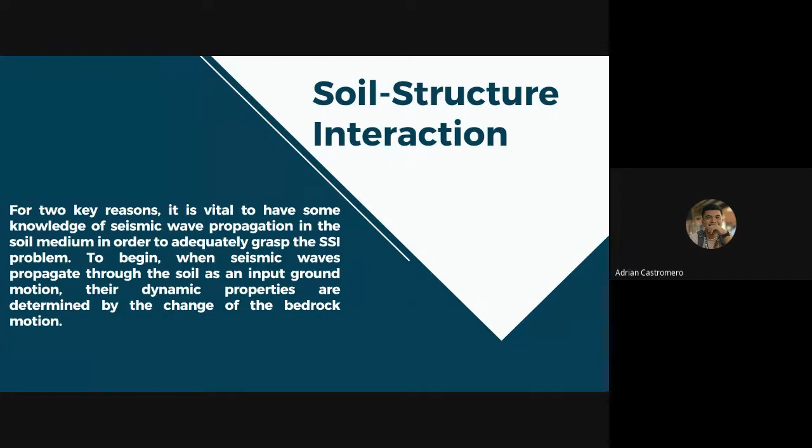So, terminologies of local site effects. Basin soil effect on the ground motion characteristic. So, first is impedance contrast. Seismic waves move quicker through hard rocks than through softer rocks and sediments. As the waves travel from tougher to softer rocks, they slow down and must increase in amplitude to transport the same amount of energy. As a result, shaking is more intense in locations with weaker surface layers, where seismic waves move more slowly. Impedance contrast is defined as the product of the material's velocity and density.

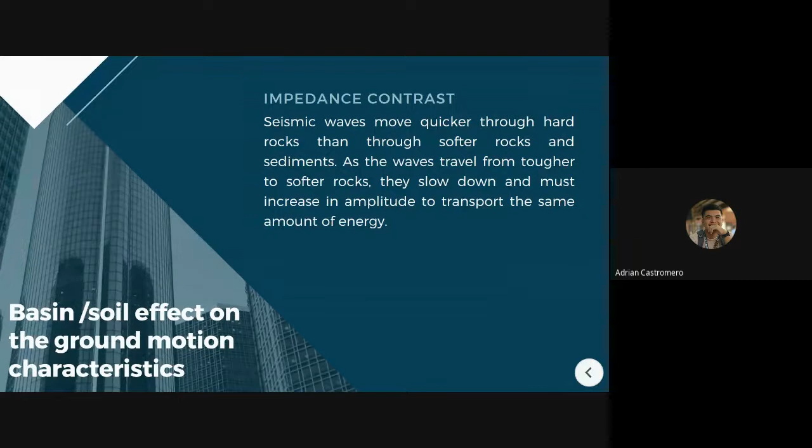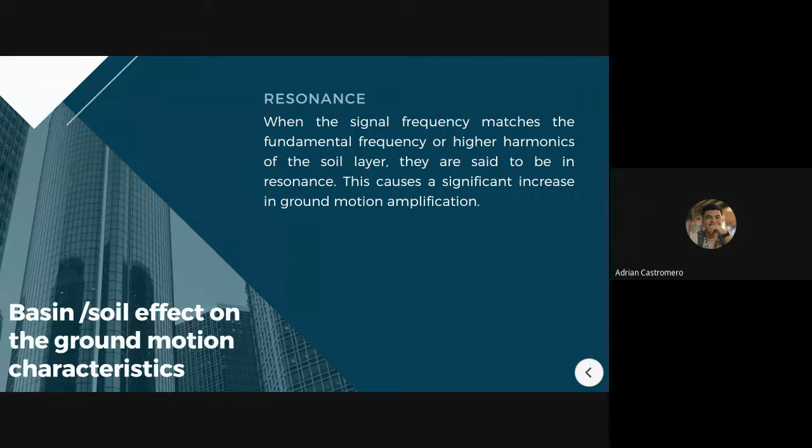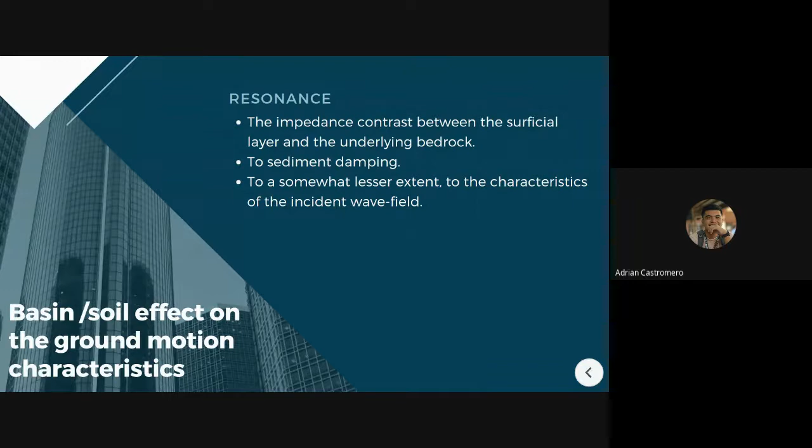Next, resonance. When the signal frequency matches the fundamental frequency or higher harmonics of the soil layer, they are said to be in resonance. This causes a significant increase in ground motion amplification. Resonance patterns are distinguished by a variety of spectral peaks. The frequency of these peaks is related to the thickness and velocities of the surface layer. Furthermore, the amplitudes of spectral peaks are mostly connected to the impedance contrast between the superficial layer and underlying bedrock, to sediment damping, and to a somewhat lesser extent to the characteristics of the incident wave field.

Basin edge effect. When seismic waves strike close to the basin's edge, they enter the basin from the edge and proceed in the direction that the basin is thickening. If post-critical incident angles occur, the waves might become trapped within the basin, as seen in figure 6.2. Surface waves are generated when trapped waves collide and they propagate throughout the basin.

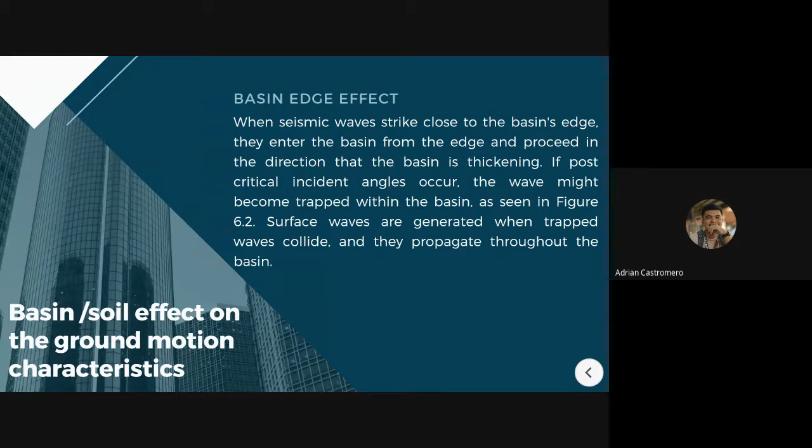Waves trapped in deep sedimentary basins can have higher amplitudes at intermediate and low frequencies than those recorded on equivalent surface material outside the basins, and their durations can be twice as long. This basin edge effect can magnify long period ground motion components and greatly lengthen the duration of intense shaking. Basin-induced surface waves cause intense damage which is confined in a narrow strip parallel to the edge.

Basement topography. When subjected to body wave incidence from below, irregular basement topography causes focusing and defocusing effects. This impact is highly influenced by the azimuth and angle of the incident waves.

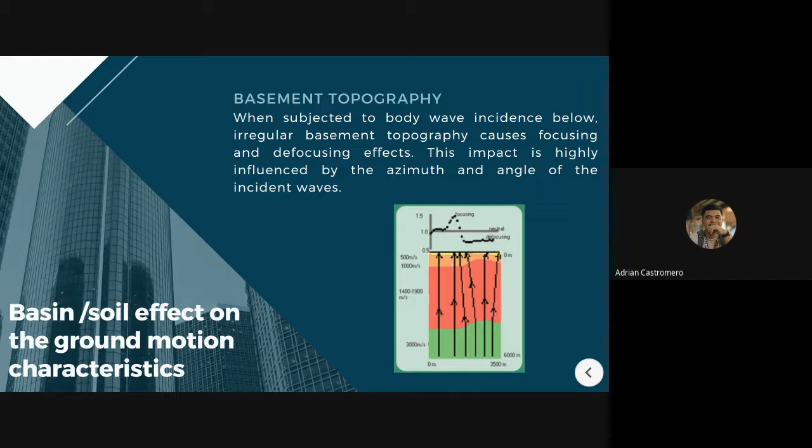Trapping waves. Seismic waves are trapped over soft sediments due to the huge impedance differential between the soft sediments and the underlying bedrock. As a result, the length of ground motion increases. When the layers are horizontal, this trapping solely impacts body waves. In the event of lateral heterogeneities, this trapping affects the surface waves as well. The interference of these waves results in a resonance pattern. As previously explained, the basin edge effect produces entire reflection of the waves at the layer's base, making them potentially highly harmful.

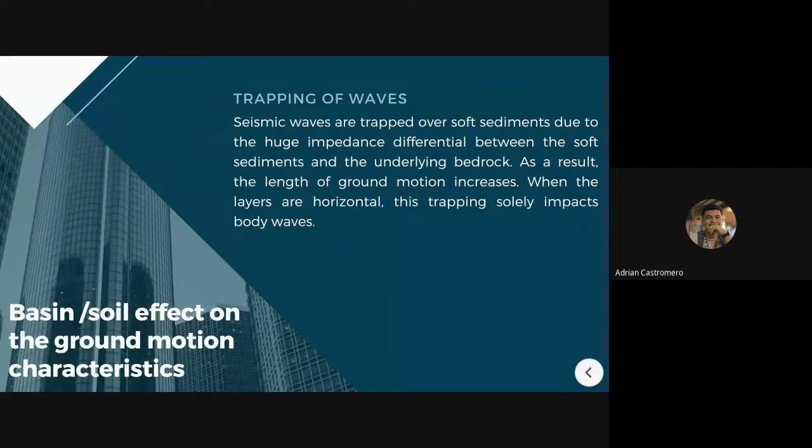So next. Okay, hello. Wait lang. So, ano, effect of surface topography. Ay, rinig po ba ako? Hello? Rinig po ako. Oo, rinig din. Sige po, thank you po.

Effect of surface topography. Surface topography considerably affects the amplitude, the frequency content, and duration of ground motion. So, on the effect of ridge, the ridge generates a large number of surface waves towards the top of the ridge, which propagate towards the ridge's base. The amplification of ground motion is determined by the slope and elevation of the ridge.

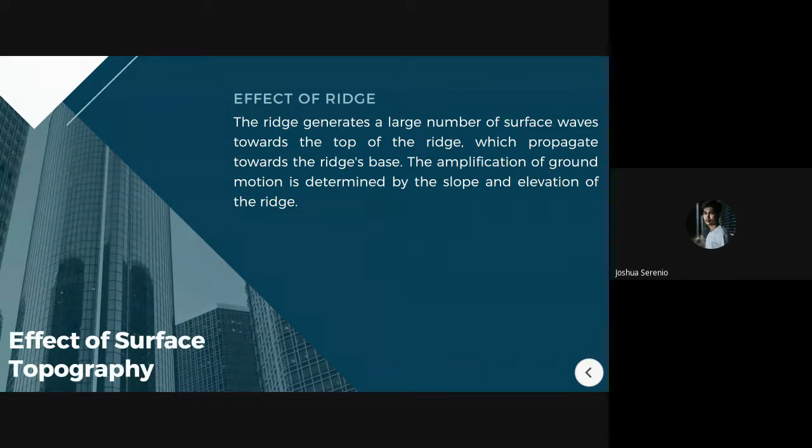Next. Effect of valley. It has been numerically predicted that the de-amplification of the amplitude of motion occurs in the valley owing to the defocusing effect. If the valley is devoid of soil deposits, the intensity may be 1 to 2 scales lower than its surrounding area. Next.

Slope effect. Here, the varying slopes reveal complex damage patterns. Buildings located on or near the bank of steeply sloping hills sustain far more damage than houses located some distance away from the steep slope or on the gentle sloping area in the same hill.

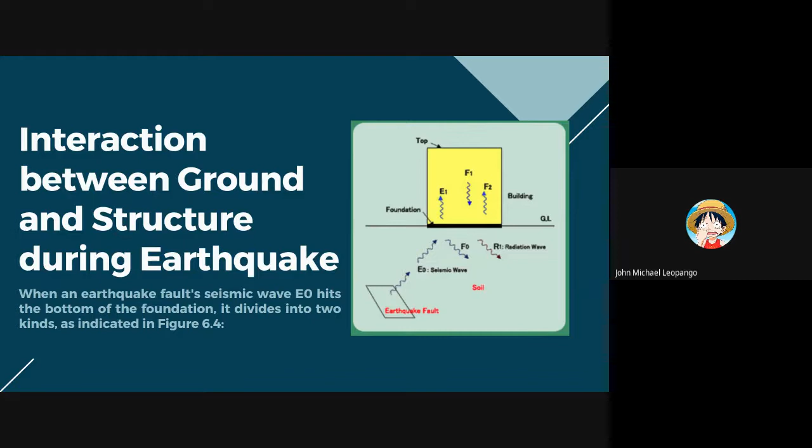When the transmission wave penetrates a building, it travels in an upward direction, causing the structure to vibrate. They are then reflected at the top and go back down to the structure foundation, denoted by F1. At this stage, the phenomenon of soil-structure interaction occurs. Again, a portion of the wave is transmitted into the earth, while the remainder is reflected back and begins to proceed upwards via the structure, depicted as F2.

So as you can see in the figure, there's an earthquake fault.

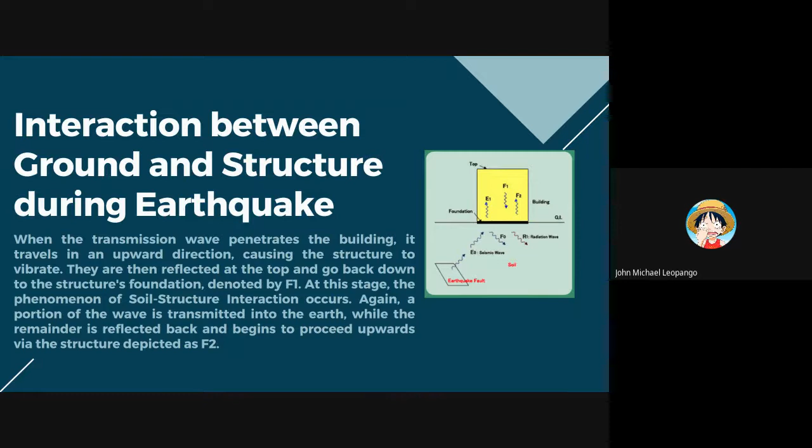Radiation damping of the soil refers to the damping generated by radiation waves. Radiation damping raises the overall damping of the soil-structure system in comparison to the structure itself. Furthermore, when subjected to SSI, the natural frequency of the soil-structure system must be lower than the natural frequency of the soil.

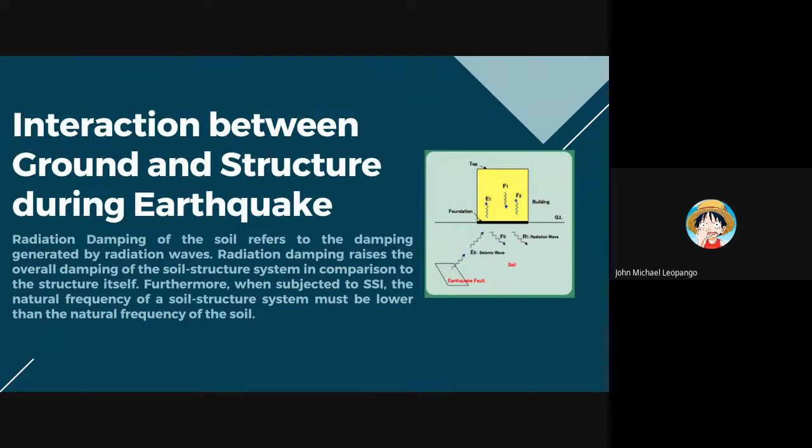First, the kinematic interaction. Kinematic interaction refers to the SSI effect that is connected with the stiffness of the structure. Because of its flexural stiffness, the massless mat foundation inhibits the vertical movement of the ground motion. As a result, instead of free-field ground motion, the mat foundation moves differently. That is, the ground motion is away from the foundation, as does the nature of ground motion in the neighborhood and below the foundation.

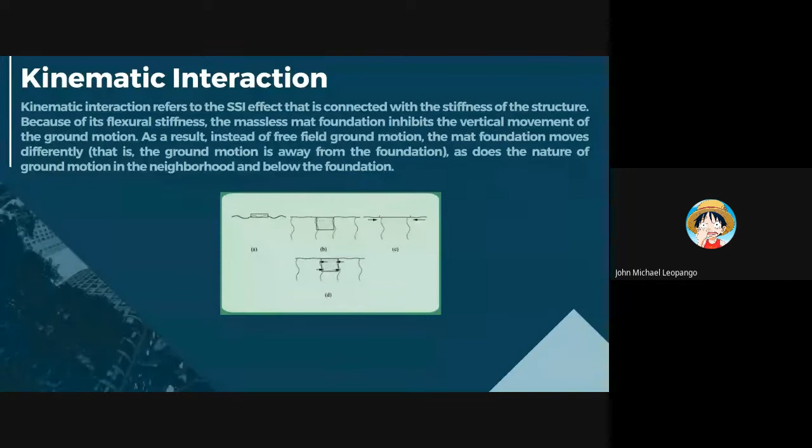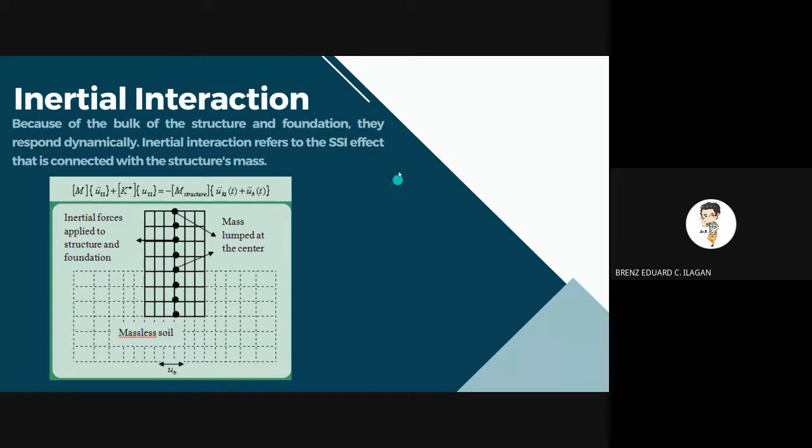Illustration of soil-structure interaction effects. A basic analysis based on Wolf's technique illustrates the soil-structure interaction. Consider the mass, stiffness, and damping coefficient of a single degree of freedom system, coupled to a massless rigid, L-shaped foundation of height as shown in figure 6.9, the one in the figure below. A horizontal amplitude stimulation is applied to the system.

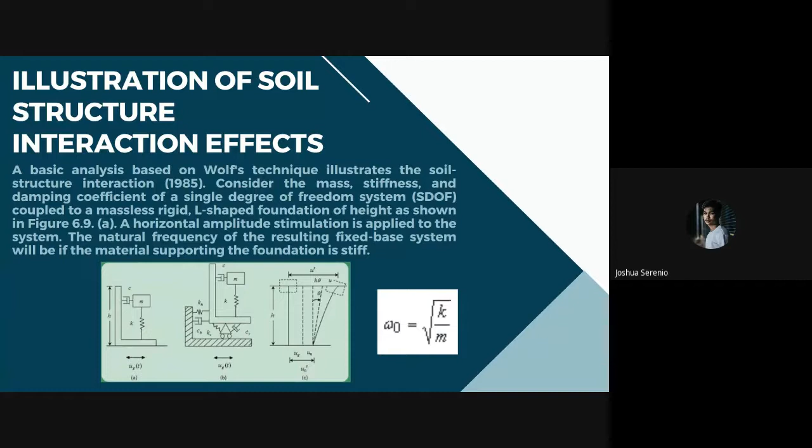The natural frequency of the resulting fixed-base system will be if the material supporting the foundation is stiff. The foundation can translate and rotate if the supporting material is compliant. The stiffness and damping characteristics of the compliant soil-foundation system are represented by Kh and Ch in the horizontal direction and in the rotational direction.

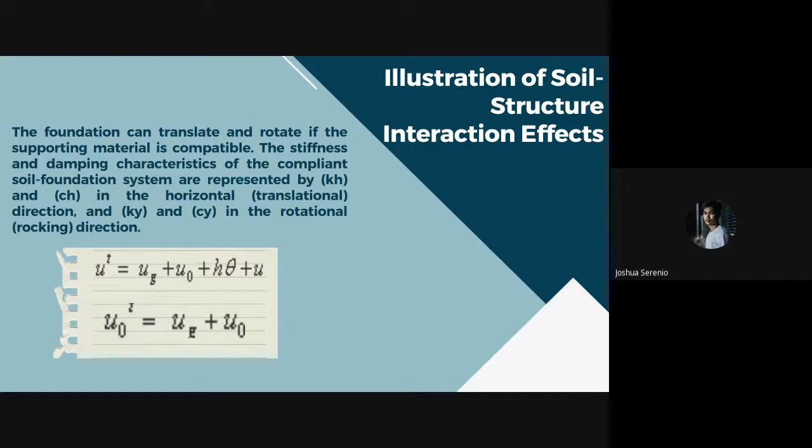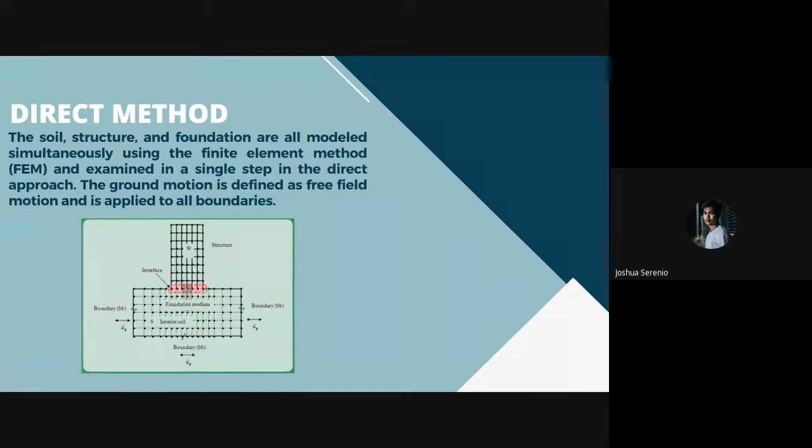Direct method. The soil, structure, and foundation are all modeled simultaneously using the finite element method and examined in a single step in the direct approach. The ground motion is defined as free-field motion and is applied to all boundaries.

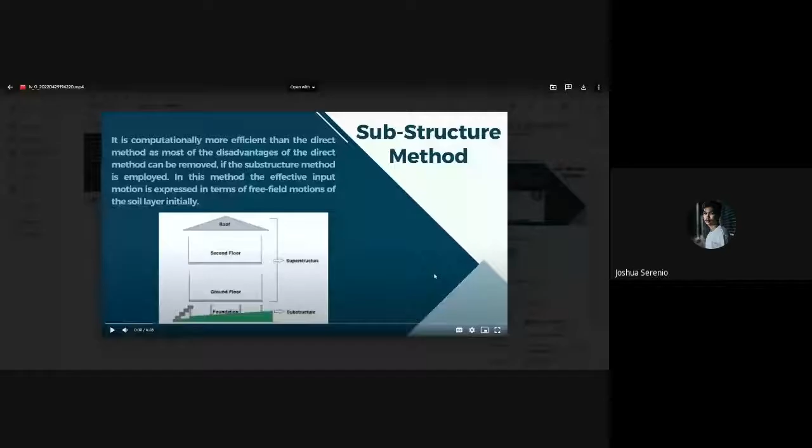Substructure method. It is computationally more efficient than the direct method, as most of the disadvantages of the direct method can be removed if the substructure method is employed. In this method, the effective input motion is expressed in terms of free field motion of the soil layer initially. The substructure method is an established way of overcoming the difficulty of large dimensionality in analysis of structures. An improved substructure analysis method suitable for structures like storied buildings and towers is presented in this paper.

This picture daw po ay represent yung substructure method ng roof, second floor, and ground floor. Sa substructure naman po ay foundation.

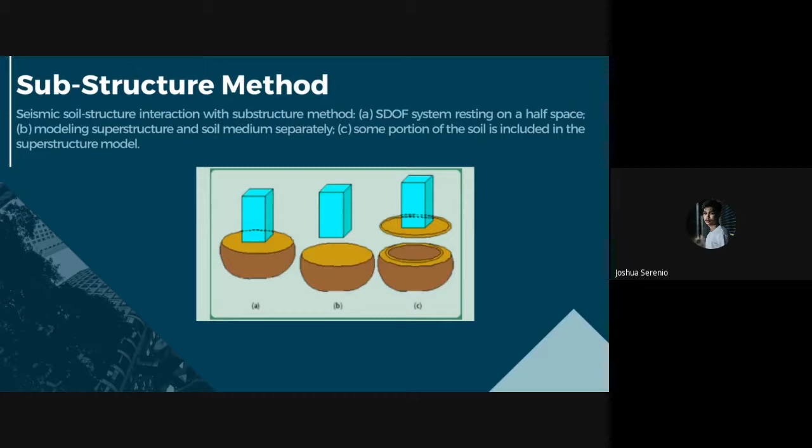Consider a SDOF system supported on a rigid base of a mass and mass moment of inertia, resting on a half space as shown in figure A. To make the torsion effect negligible, the horizontal dimensions of the base are assumed as sufficiently small. The uniform free field ground acceleration at the free surface will introduce the foundation forces at the interface between the base of the structure and the half space.

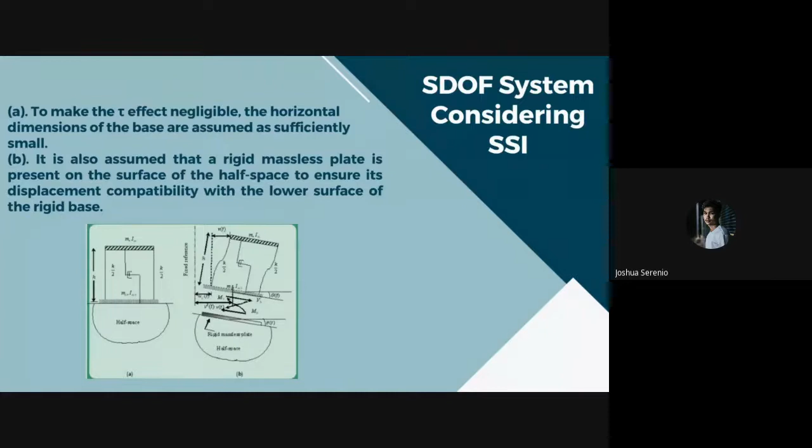B. It is also assumed that a rigid massless plate is present on the surface of the half space to ensure its displacement compatibility with the lower surface of the rigid base. The total base displacement of the SDOF system shown in figure will be v^t(t) = u_g(t) + v(t), where u_g(t) is the free field ground displacement and v(t) is the added displacement or base displacement caused by SSI. Also, θ(t) represents the base rotation caused by SSI.

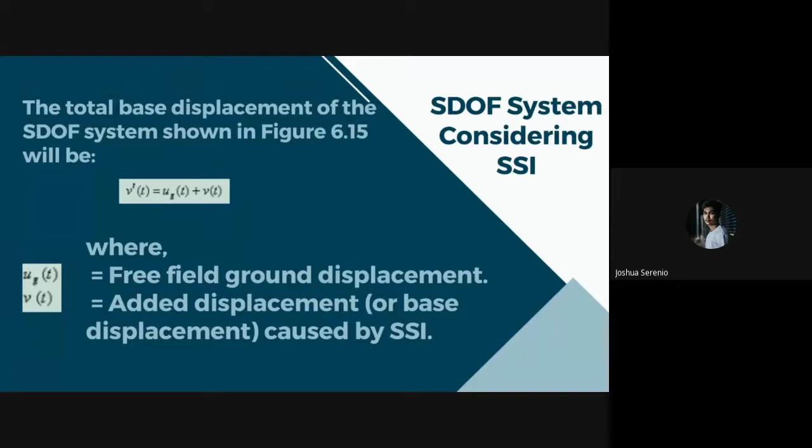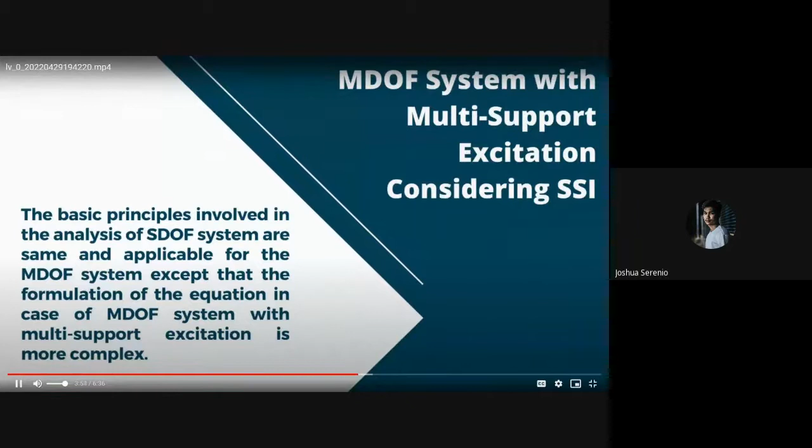It is also noted that as the SSI results in translation and rotation of the base of the SDOF system, it introduces added displacement of the system, and thus the overall system has 3 DOF. MDOF, or multi-degree of freedom system, with multi-support excitation considering SSI. The basic principles involved in the analysis of the SDOF system are the same and applicable for the MDOF system, except that the formulation of the equation in case of an MDOF system with multi-support excitation is more complex. MDOF system with multi-support excitation considering SSI.

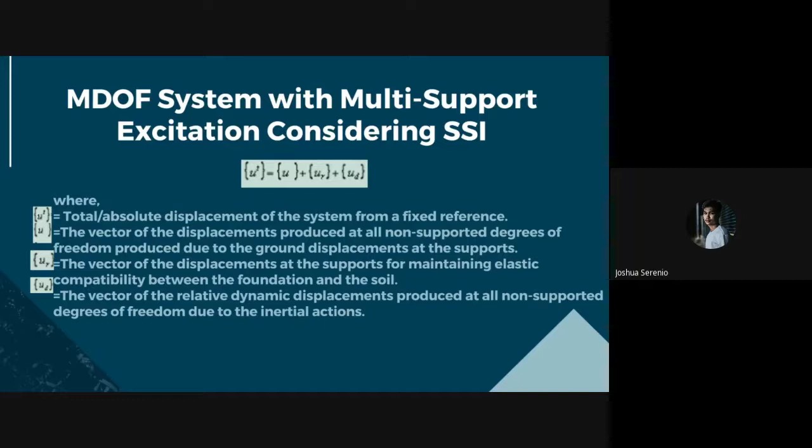Equation: U^t = U + U_r + U_d, where U^t is the total or absolute displacement of the system from a fixed reference. U is the vector of the displacements produced at all non-supported degrees of freedom due to the ground displacements at the supports. U_r is the vector of the displacement at the support for maintaining elastic compatibility between the foundation and the soil. U_d is the vector of the relative dynamic displacements produced at all non-supported degrees of freedom due to the inertial actions.